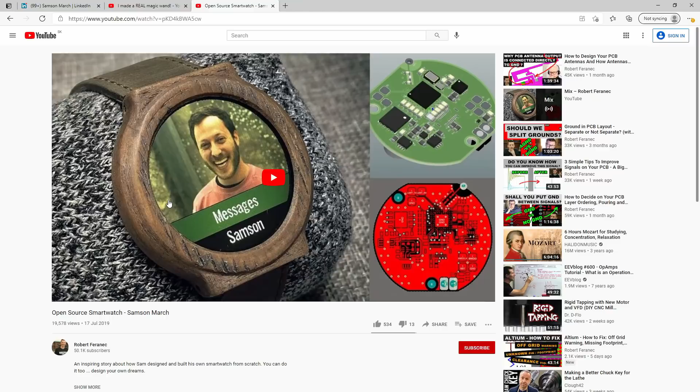In this video, I'm going to play a call which I had with Sam, where he talks about his latest open source project called Magic Wand. The project is about creating a wand which can be used to control, switch on and switch off different electronic devices. Maybe you remember I already made a video with Sam where he talked about how he designed his open source smartwatches, and you may also know Sam from his other project called Smart Glasses.

All of Sam's projects are open source, and if you'd like to have a closer look, just go to Sam's GitHub. Here you can see all the files for the smartwatches - the PCB files, schematic, and software files. Here you can also find all the files for the smart glasses, and also for the project we're going to talk about, the Magic Wand.

This project, which Sam is going to talk about in this video, is basically a wand with a battery powered circuit, and this circuit can sense the movement of the wand, and through Bluetooth it can send these movements to a plug which can then switch on or switch off the devices connected to it.

Okay, that's everything for the introduction. I really hope you'll find this video interesting and learn something new. Sam is going to start by answering the question: what kind of project should you want to work on? So here is my recorded call with Sam.

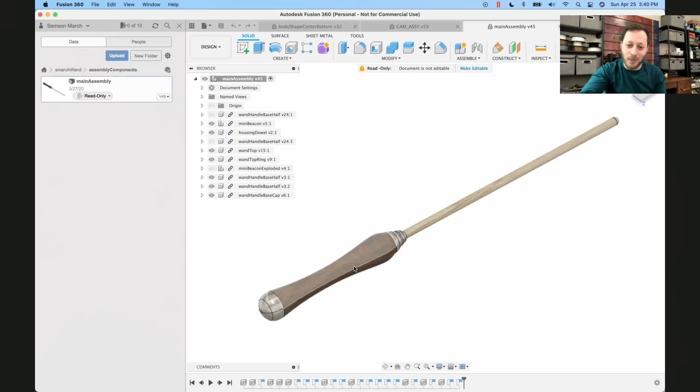Yeah. So here you can see this is kind of—I wish I was good at drawing, I feel like that would make my life a lot easier, but I'm not good at it. So typically, to put ideas on paper, I'll open up some CAD and start creating shapes. I was like, okay, this was kind of the shape that I thought I wanted, and I started thinking through how I could make this—okay, I'll make a top part, a bottom part, maybe buy a dowel from a hardware store and use that as the wand part, and I have to find a way to hide stuff. So I started thinking through all that.

And then as I started thinking through it more and more, you can kind of see here a whole bunch of different parts on the side. As I got more intricate with my designs, it ultimately led to this. We can talk about all the different parts individually, if you'd like, and how they all fit together.

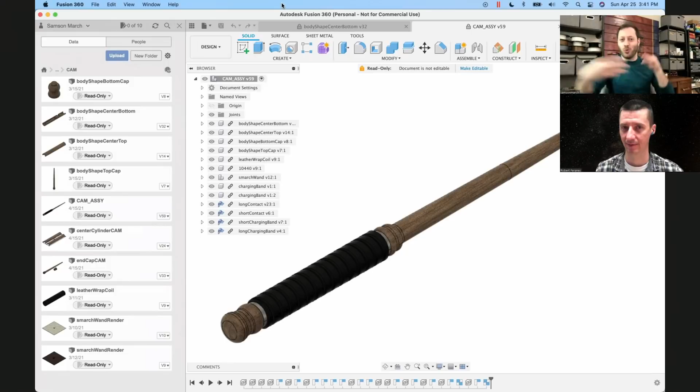But initially you only had this shape and maybe an idea of how it's going to fit, but you didn't have all the parts yet? No, no, no. Originally it was just one solid piece that I was thinking was going to be this shape, and I knew it had to be no wider than this width. Did you try to build it? No, I didn't.

Because for me the most important part was, when I was holding it, I wanted it to feel like a magic wand. So I went around the house and started picking up things that were long and narrow—like if I held up a pen, does this feel like the right size? No, it's a little too small. What about a Sharpie? Does this feel right? Oh, this is closer. I started picking up different things around the house—so, is this too big?

Is this too small? Type of thing. And I think I narrowed in. I want to say it was maybe 16 millimeter. It was the width that I felt for my hand was the right size. And I'm sure it's different for different people, but for me, that was the right size. It felt like this is something that I could keep in my wizard robe, and I could pull it out, and it would feel like my magic wand.

So you knew how it is going to look, and then you took some reference board, I think? Yes. I have some development boards, and I actually have one right here, so I can show you. I have these development boards that I bought, and it has the Bluetooth micro that I wanted to use, and I soldered on a little accelerometer development kit as well, and this way I could play around with it a little bit.

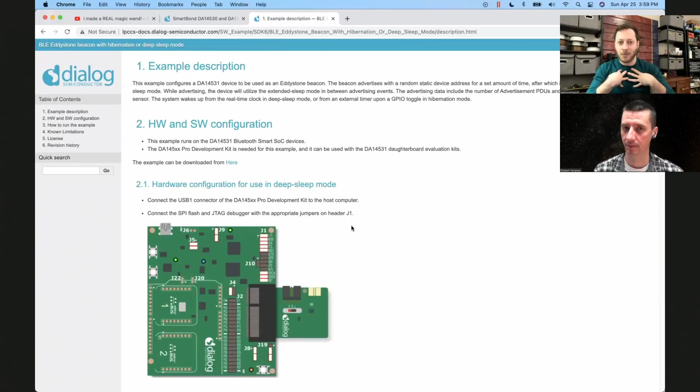This is what you have to plug in. This is how you run the setup. Start Keil, open this, blah, blah, blah. And they talk you through everything, which is really nice. And it makes it very easy for someone who's firmware dumb like me to understand this stuff and actually make it happen.

And how difficult is it for people to understand the Bluetooth protocol from this documentation? Do they need to study it a little bit differently? Because I was curious, so I created one project on Bluetooth, and I know it's not only about the communication and the firmware, but you also need to understand what these devices are talking about. So you need to get some kind of background about how Bluetooth works.

I would say that if you are just starting out, there are some good websites that have a quick intro to BLE, explaining the GAP, the GATT, the services, characteristics, descriptors, all those different things. There are a ton of things that go into it, and it can be overwhelming and complicated.

The way I like to think about Bluetooth, and you can cut this from the video if you want, is like a big apartment building, where the device that you're communicating with is this apartment building. So when you walk into the apartment building, the way that the information is structured is each floor is a different service. So I can go to the second floor, and that's this particular service.

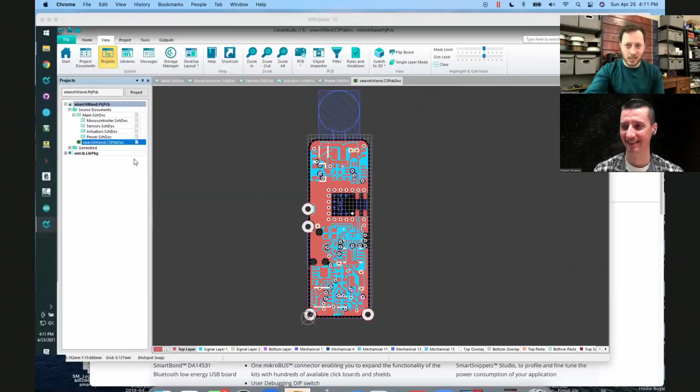And then the next phase was building it. Next phase was building the electronics. Yeah. And I'll jump over to the schematics right now. This main page that we're looking at right now is, if you think of just like a block diagram drawing of everything, right? So you see there's a microcontroller page, an actuators page, power page, and a sensors page. Nothing crazy going on here other than this is just generally almost like a table of contents. You're seeing how the whole thing is going to be laid out.

And so typically what I start with is the brain, which I consider the microcontroller. This block here in the middle, the one that's labeled BLE, is that Dialog chip that we were just talking about, that DA14531. I really like this chip. This one has built in the Bluetooth. Yes, it's an ARM M0+ core, and it has the Bluetooth radio and some additional stuff built into it. And you can get the kind of firmware where everything is running, and you just build on top of this your own application. Yeah, absolutely.

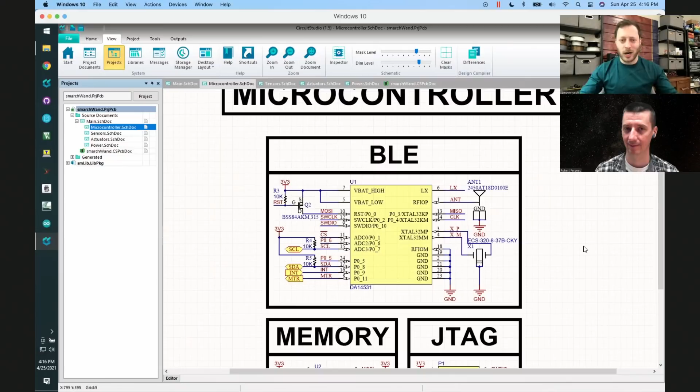Which is great. One of the things that I really like about this part, and the reason that I've actually used it now in 2 or 3 projects, it's really small, it's really cheap, and it uses really, really small amounts of power. The transmit power for this device, when it's actually transmitting over Bluetooth full blast and everything's running, I think it's like 3 or 4 milliamps. I know, that's the reaction that I had. It's so small. It's like an LED. Yeah, I think it's actually less than the LED that I have on here, right?

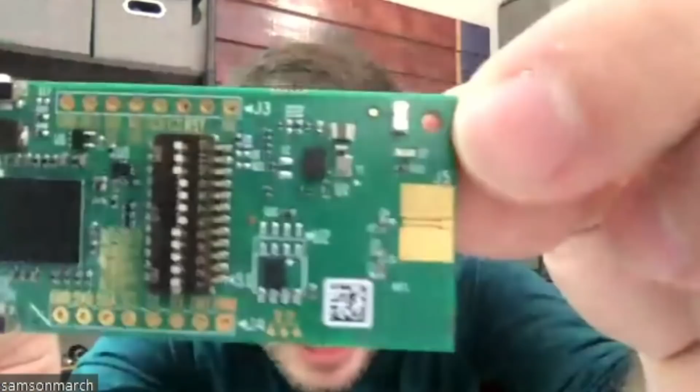And not only that, it's 2 millimeter by 3 millimeter. It's tiny. I don't even know if you can see it in here, but the little black chip right there next to my finger, that's it. That's the whole thing, right? So it's really small. It's like 50 cents in high quantity, and it uses super low amounts of power. The biggest downside, and it's kind of up to each individual person, but there aren't that many I/O, right? This is the entire part. I think it's like 24 pins or something like that total.

So it's small. There aren't that many I/O, but if all you need is maybe an I2C bus, 2 or 3 I/O pins, that's more than enough, right? Like for this project, I needed an interrupt I/O, one I/O to trip the vibration motor, some I2C pins. For the sensor, I guess. Yeah. For the glasses, I wanted to make sure that I had different color LEDs, right? So I needed different I/O for each color of the LED. I just put a small I/O expander on this I2C bus.

So it all kind of just depends on what you need. But if you just need to turn something on or turn something off, and it doesn't have to happen really fast or whatever it may be, maybe an I/O expander is all you need, and then you can use something like this where you don't have a ton of pins.

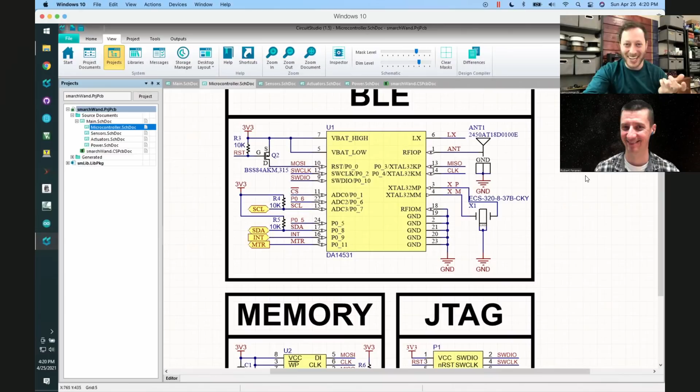Other than that, the output of the antenna is 50 ohm. Normally, I would include a little pi network between the chip and the antenna to make sure that I can tune that impedance. But I don't have a network analyzer here at home because I haven't paid $40,000 for one. And when we get there, I'll show you the trace length going from the actual microcontroller to the antenna is like 20 mil long. So I was like, one, I don't have enough space for a pi network, and two, I'm not super concerned about impedance mismatches right here, as long as I roughly get my coplanar waveguide math right.

Other than that, on this page, there isn't much more. I have a little bit of flash memory. How do you use the flash memory? So it's SPI flash. But is it the firmware inside of the flash memory, or you have it just for some additional data? Both.

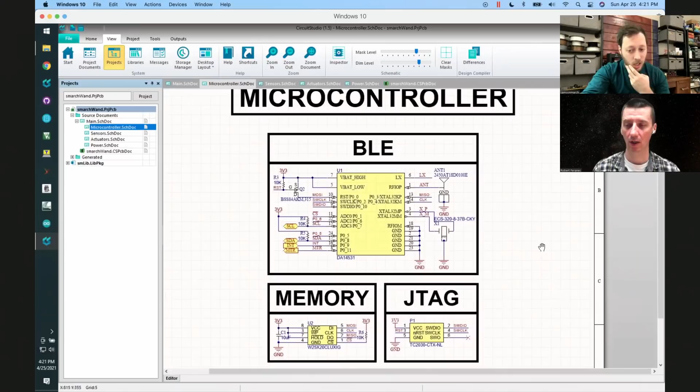So there's no flash inside of the microcontroller? Yes, that's correct. That is a downside to this part, right? There's no built-in flash to this part. The way that this part works is when it first comes on, the bootloader will look to see if there's any SPI flash connected, and then it will look at a specific address for the code. Once it finds the code that it's going to run, it will pull all of that and load it into some internal RAM so that it can run the application code.

So does it mean you have to program this flash before you solder it down? No, you do not. Okay, so there is something inside of the microcontroller, a bootloader or something? Yeah, there is some ROM, and actually, if you really want to, you can. There's enough memory on here that you could do a one-time programmable flash to ROM.

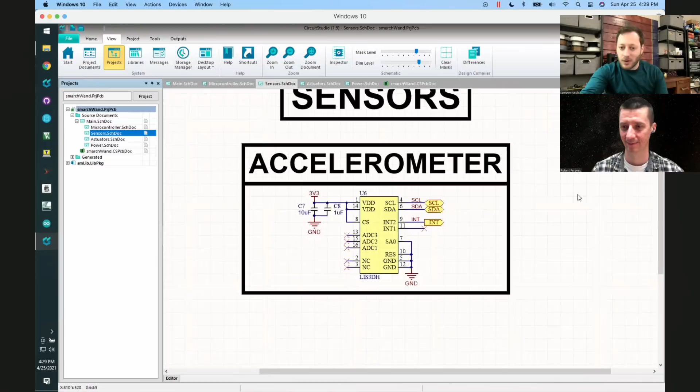So if I was going to do it again in a different world, that's how I'd want to do it. In this scenario, I had to do a little bit of firmware trickery and some filtering to try and figure out what is actually happening without knowing what the velocity was. So this page is pretty straightforward. It's just the accelerometer. It's read over I2C, and there's an interrupt.

The way that the device works is it goes into a low power mode 3 seconds after the last movement. So after I do my gesture, if I hold still for 3 seconds, everything shuts down. I think it draws like 150 microamps in sleep mode. So my one LiPo battery in theory could last like 50 to 75 days, depending on how much I'm using it.

So what happens is as soon as I take the wand and lift it into a particular position where I'm pointing the wand straight up, that interrupt pin will toggle and wake up the microcontroller, and then everything starts. So when that interrupt pin wakes up the microcontroller, the microcontroller then turns on this vibration motor for 1 second.

So this is feedback for you that you can make the gesture. Exactly, that's exactly it. Because it looks like a wand and there's nothing else there to indicate it's listening, I thought, what's a cool magical way to know that you're ready to cast your spell? Well, the wand has to vibrate with all of this magical energy, right? So you lift your wand up, it vibrates in your hand, and as soon as it's done vibrating, it's ready to start listening to gestures.

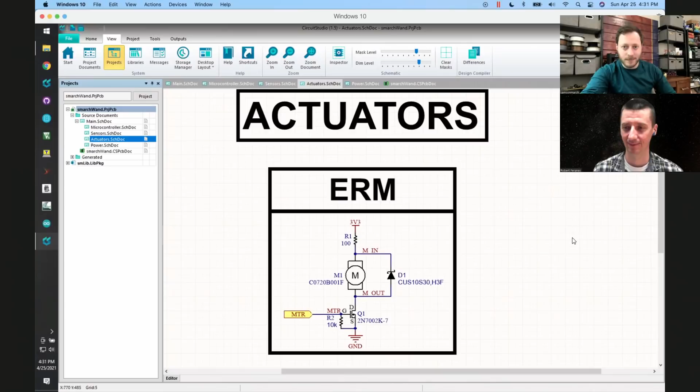So on this actuator page, there's literally one thing. It's just this tiny vibration motor with a little FET to turn it on and off and a flyback diode. Nothing too crazy. What runs everything is here on this power page. As we talked about earlier, this is like the digestive system: what takes the energy in, turns it into usable energy for the system, and then distributes that energy.

The charger and the battery are pretty self-explanatory. The battery is a lithium polymer battery, and the charger is just there to charge it. The more interesting stuff is the protection and the buck. The buck is the regulator we talked about earlier, going from the battery voltage to 3.3 volts. What is the efficiency? I'd have to go and look, but I want to say it was like 85 or 90%. It's pretty good, not perfect. Nothing is, but it was good enough.

It's tiny. It's this little 5-ball BGA, which is one of the reasons I'm using it. Let's see if I can point it out to you guys. The little black dot right there next to that big inductor and that small 0402. The inductor is bigger than the buck, right? So that guy right there is the little buck. It does a good enough job. I've used that part before, so I knew it would work the way I wanted. I was happy with it.

All it requires is some input capacitance and some output capacitance. There's no feedback pin for an adjustable voltage or anything like that, so again, I'm trying to minimize part count to keep it all in this small space. I only ask because I was working on a battery powered project, and we had to count every microamp. For this project, it wasn't as much of a factor, because it sleeps all the time.

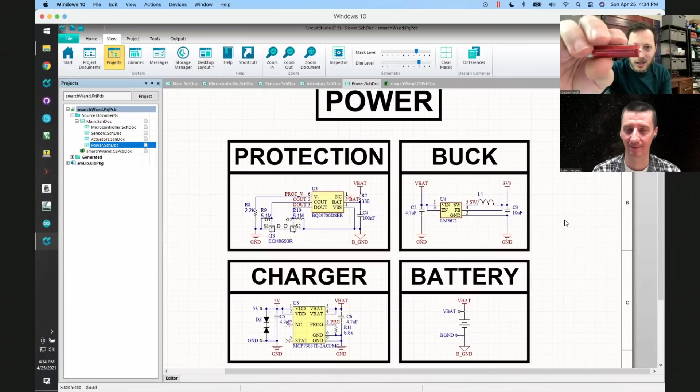The power consumption of the device when it's fully active is 5 milliamps or something like that, when everything is on. And these are the batteries I'm using. They're 10440, so 10 millimeters by 44 millimeters, basically just AAA size LiPos. They say they're rated for 350 milliamp hours; they're probably 250. But when I'm using 5 milliamps active for 10 seconds every 2 or 3 hours and it's sleeping the rest, it's such an insignificant power draw compared to the battery that I wasn't super concerned with the efficiency.

It is a big deal in other scenarios, like the glasses. I don't have one of the boards around, but on the glasses I was using a tiny lithium ion coin cell battery, I want to say it had like 10 milliamp hours. It was tiny. So for that one, it was a really big deal to figure out the efficiencies and make sure everything was good.

Other than that, on this page, there's this protection circuitry. Is this the same one as in your smartwatch? I think it probably is. Very similar design, very similar idea. All it's doing is disconnecting the grounds between the circuit ground and the battery ground when the battery needs to be protected, so if the voltage is too low where you might damage the cell, or the flip side, if you were to accidentally apply too high of a voltage, an overvoltage scenario, it would just disconnect the battery so you don't accidentally damage the cell.

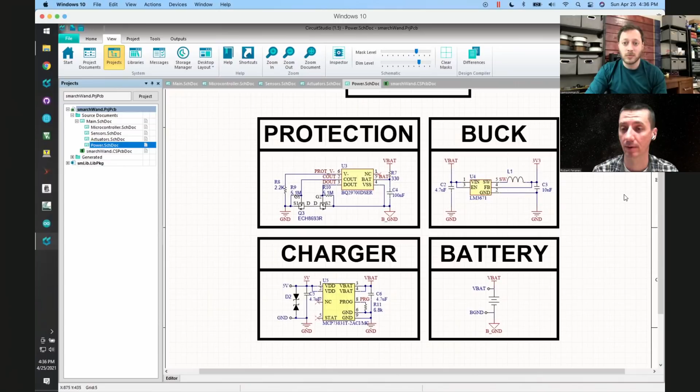That is the schematic, that's the whole thing, that's the entirety of the wand. What makes sense to do now? Do you want me to jump into layout, or talk about something else? Let's have a look. I'm thinking what would be better. Yeah, layout, let's do layout. And then we can do the socket. Yeah, for sure.

So pull up the 3D view first. So this is the layout, this is the whole circuit. Nice 3D model again, thank you.

So here, I can't remember the exact size of the board, but we'll do a quick measure. So the board is... there you go, the board is 10.5 millimeter by 30 millimeter, so it's a very, very small board. And actually I made sure to pull one out before we started, so let's just hold up - so this is a AAA battery, and this is the one board.

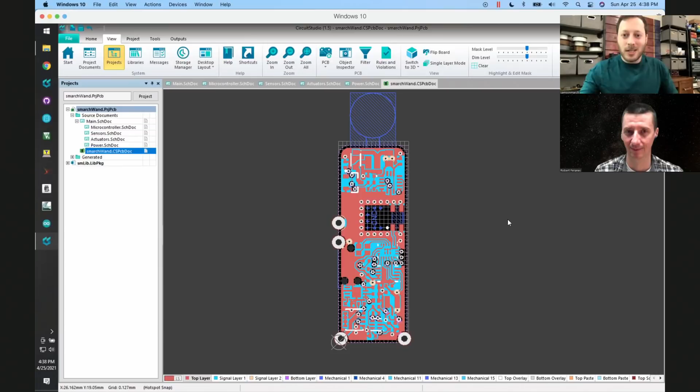So you can get a feel for how big everything is and how much space I actually had - not a lot. I wanted to keep all the assembly on the top layer because I'm assembling everything by hand, and I didn't really want to do a double-sided assembly. I've done them before, but if I didn't have to, I'd prefer not to. So everything, all the components, are on one side. This is the back side - the only thing on the back side is the JTAG.

So you flash it on the back side, and then this is the front with all the components. We'll quickly just run through what the placement of everything is, and then if there are sections you want to talk about, maybe we can jump into those to give you a better feel. So you may notice these castellated pads in the corners.

We'll talk about it a little bit more when we get over to the 3D model, but this castellated pad here on the right-hand side is the positive terminal of the battery. This is the negative terminal of the battery. These two castellated pads are for the charging contacts - this top one is ground, this bottom one is 5 volt.

Other than that, let's see, so down here - can you see my mouse? Yes, I can see. Okay, so the stuff here in this bottom left corner, this is the protection circuitry stuff. This is that little protection IC, this is that dual NFET package. This guy right here is that little buck converter we were talking about, this is the inductor for that buck converter. This right here is the battery charging IC. This right here is the flash for the device. This is the micro - you can see that little tiny trace going straight to the antenna. This is just the crystal for the micro.

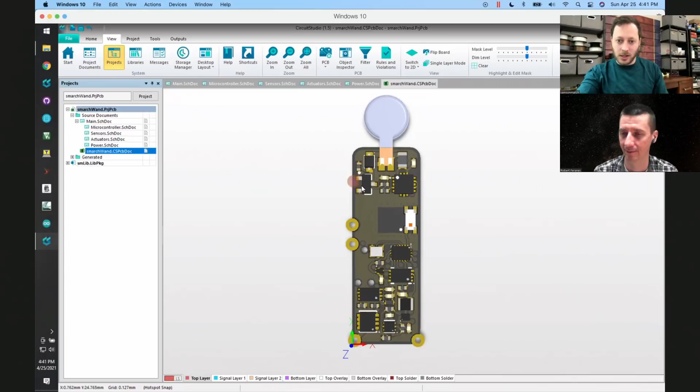And then all of this stuff is related to the vibration motor, which is right here. This is the little FET, flyback diode, current limiting resistor type of stuff for that motor. That is the whole thing, right? That is the entirety of this design.

Is it enough that you basically hold it, or where exactly is it placed in the wand? It's right under your hand. So a lot of the Bluetooth radiated energy is attenuated by your hand, which is not great. I agree, for the signal integrity, right? Yeah, it's not going to hurt you, but it is just one of the unfortunate things.

That being said, I'm still getting pretty decent range from it. My house is not huge, but I can be on one side of the house and wave the wand around, and I can turn stuff on the other side of the house.

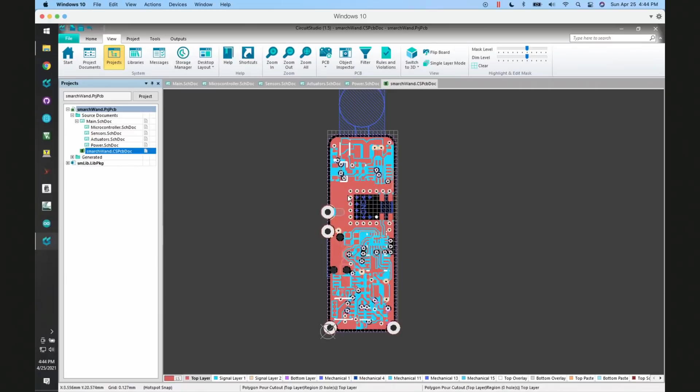You were asking about the copper under the antenna. You can see here, all this is removed right here. The board is actually a 4-layer board. The red is the top layer. The blue is like a ground plane on the second layer. This yellowish color is the 3.3 volt rail power plane. And then the bottom is just more signal with another kind of ground pour around it.

Where do you manufacture your PCB? So all these were made by PCBWay in Shenzhen. But they've done a great job. I would say I've probably been using them for personal projects for 5 years, maybe 6 years at this point. And I don't want to turn this into an advertisement, but I've consistently had really good experiences.

I know them. We have been providing some coupons for our students for good discounts, some of the time. I really like them, I've had really good experiences with them. Even their customer service, if I have questions, they get back to me pretty quick. Price is good, the speed is really good on them.

Like, the boards that I had made, these are the smart plug boards. I probably ordered them on like a Thursday, and the next Tuesday or Wednesday they were at my house. And I want to say I probably paid $50 with shipping for maybe 50 of them or something.

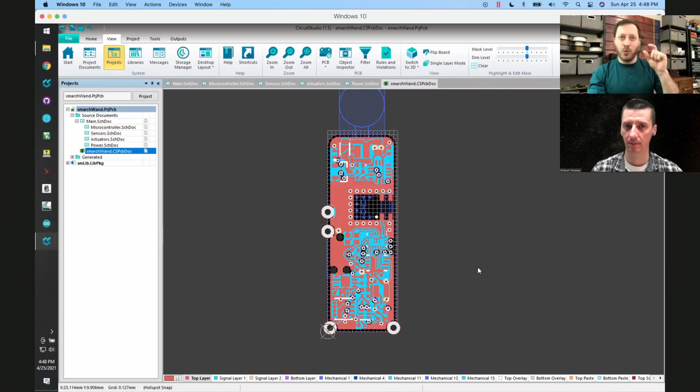Do they have a stack-up on the website with impedances? Yeah, you can go on their website. They show you all their standard stack-ups for their different layer counts and different widths. So this wand board—I think the wand board and the smart plug board actually are 0.8 millimeter thick boards, not the normal 1.6 millimeter. Part of that was because with these smaller thickness boards, the way the stack-up worked out, the antenna trace could be a pretty normal size trace. I think this ended up being, let's see, what is this?

This is 0.2 millimeter width. The bigger the gap between this top layer and that reference plane, the bigger that width has to get. So, one for size reasons, but two because it makes that antenna routing a little bit easier. I've been really liking the 0.8 millimeter stack ups recently.

They have a big page dedicated to, if you want a 6-layer board at 0.8 millimeter thickness, this is what the stack up looks like, and this is what the dielectric constants are of all their different prepregs and cores and everything like that.

Do they suggest also the impedances, or do they have a calculator for impedances, or do you have to use something like Saturn PCB to calculate them? I use Saturn, yeah, in fact I have it right here, the Saturn PCB tool.

I don't remember if they have dedicated numbers for like use this trace width and this spacing. Actually this is why I use JLC PCB, because they also have a calculator.

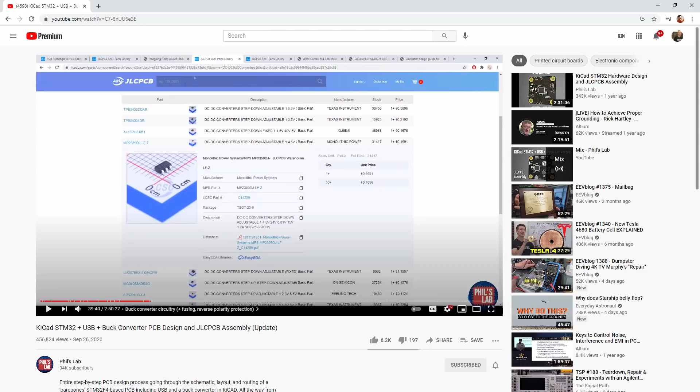I've seen some videos from Philip, you probably don't know him, but he's using KiCad and JLC PCB, and he also always builds the PCBs directly in JLC PCB. I was surprised, like the price is very low, and you don't need to handle components, you don't need to solder it. They do it.

So that's the big thing that I want to try, their assembly services are really cheap for their library of parts. Exactly, yeah, you need to be willing to use components from their library. If you're willing to use their parts, it can be pretty cheap. So I definitely want to give it a go.

So basically, when you buy this PCB, you also get the stencil, I think, through PCBWay. I actually use a company called Osh Stencil. I started using them before PCBWay started offering stencils, and Osh Stencil has been consistently really good, so I've just been using them for years now.

So you upload like top layer data, stencil data, and then they will send it to you. This is their site, it's not super pretty, but it's pretty cheap, it's like $10 for a stainless steel stencil. You upload the Gerber files you want, and they'll laser cut it and send it to you.

So if I'm doing a two layer assembly, I'll upload the top paste and the bottom paste and the keep out layer or the tool routing layer or whatever. If I'm only doing one side, it's just whatever paste layer I need, and that's it. And then they send it over.

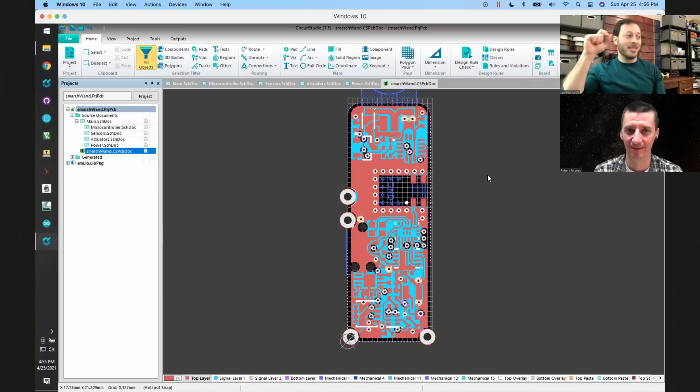it and place everything. So then the next step is after it's got paste on it, I take some tweezers and one by one, I put every part down and make sure it's all roughly in the right spot. One of the nice things about solder paste and reflowing is as long as you're close to being in the right spot, when the solder paste heats up and reflows and turns into molten liquid solder, the surface tension of that molten solder kind of aligns all the parts. It pulls them to the right spot. So I have to be close, but I don't have to be 100% perfect exact, which is nice.

What solder do you use? Because there are like many. Do you have a favorite? I don't have one. I'd have to go look at it. I can send you a link later, but I'm sure I just went to DigiKey and I was like, oh, lead-free solder paste. Okay. And whichever one they had in stock and was relatively cheap, I was like, that's the one.

Okay. And I've seen you have a very nice little soldering oven machine. Yeah, the little oven. The little oven is probably one of the best pieces of equipment that I bought. Which one is it? It's the T962 or something like that. It's a pretty common one. Can you find it on the internet? I think it's the T962. Yeah, T962 reflow oven. Let's see. You can get it on Amazon. Look at that. That's exciting. Yeah, this is the one.

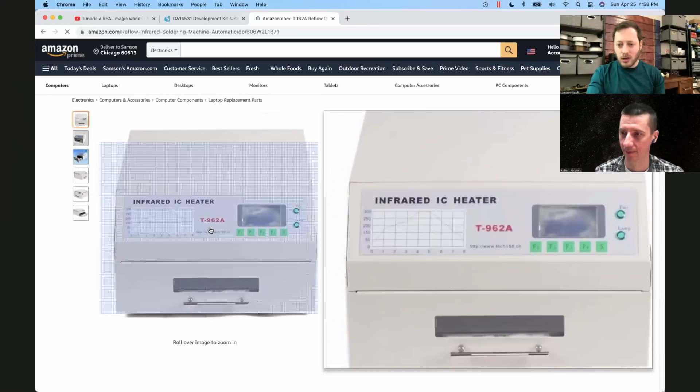And it has the option to, let's see if I can find a picture for it. I'll go back to that Amazon one so we can look at a better picture. But you can select from a whole bunch of different reflow profiles. It has a whole bunch of preset ones, or you can make a custom one. So if you want it to go up to this temperature by this minute, if you want to do a soak and then you want to do a full bake, you can adjust it. It's granular to every 2 or 3 seconds. So you can adjust everything and it works great.

The one downside to it is it's not a perfectly even heat distribution inside. So there are kind of some sweet spots, like if I put a board here, I know it'll reflow. If I put a board over here, some of it may reflow. It's not consistent all the way through, but it's one of those things that you kind of pick up. Okay. Let's continue with the wand.

All right. So I'm going to close that for now and the side panel just to make this a little bit bigger. So this is the wand as a whole. It's made up of 4 parts plus this leather wrap around the middle. And I will turn off the leather so we can kind of look at it. And I'll turn off all of those guys. So the 4 wooden parts.

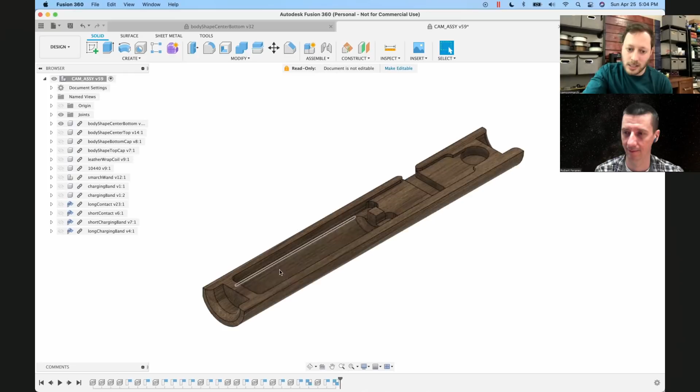I'm going to turn this and you can probably see there, one side of the wand is actually flat. You see this flat side right here? Let me see if I can do it from... I can see it. Yeah. So one side is curved, one side is flat. And the one thing that we haven't really talked about is how the battery and how the charging pads actually connect to the circuit. So I'll show you that in a sec. But this flat right here is for the charging pads that we'll talk about.

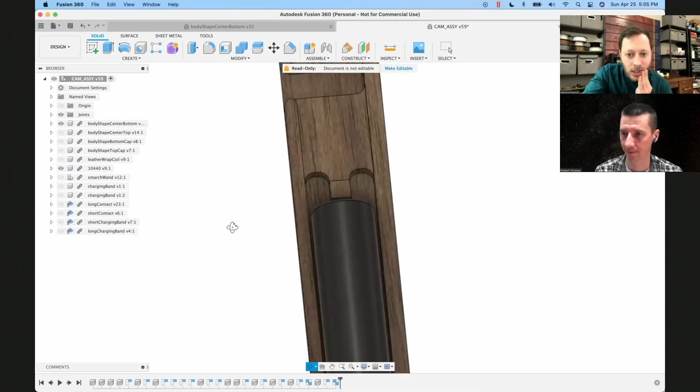So here's the bottom, right? And here, this is the battery, so you can kind of see where it fits, right? Let's see if I can find a better angle to show you. So battery, bottom part, and then if we include the wand PCB, right, you can kind of see now where it all fits relative to the battery, where it fits relative to the wand part.

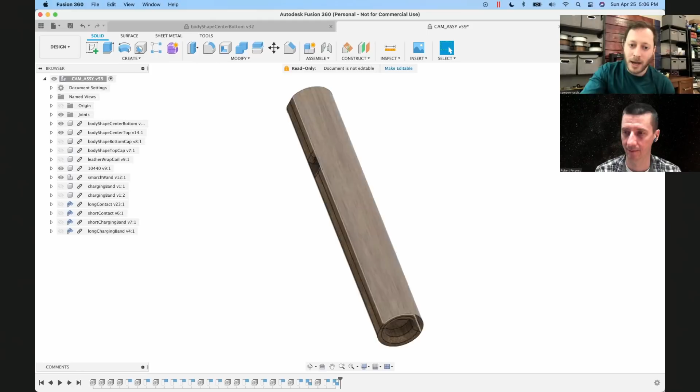This whole thing is then covered by a top piece, top wooden piece. And inside this piece, it looks very similar to the bottom where it kind of has that scoop, that cutout for the battery, and it has another kind of scoop cutout above the PCB for taller components. And so in reality, this is everything you need to make it work. The other 2 parts are purely just aesthetic, right? They're just to look good.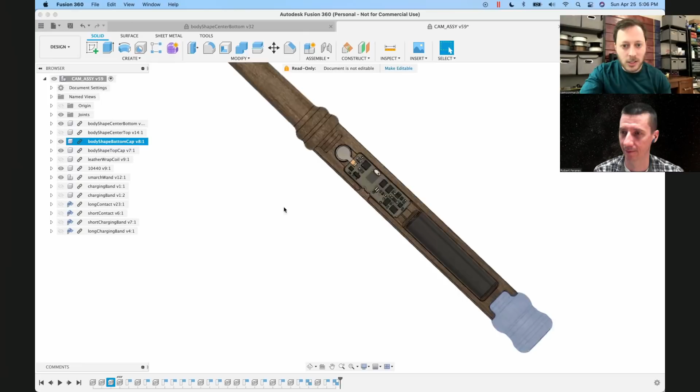So here we have this little end piece, this little cap, and here I'll turn off the top so you can kind of see. So this little end cap piece, he fits in, kind of press fit, and then I added some wood glue just to keep it in place. And then the same is true for the top part, right? So again, this big long piece, it just press fits in plus some glue just to keep it in place. So this is what it looks like when all the wooden pieces are put together.

Remember when we talked about it though, I want to make sure that it looks like it's one constant piece of wood, right? So ideally, I don't want to know that this middle piece, the part that I'm holding, is made of 2 different parts. I don't want to know that there's these metal charging contact things that are going to come out in a sec. I don't want to see that there's a split in the wood grain or anything like that.

So to hide all of that, I thought it'd be kind of cool if I just added a leather wrap around, and that way it just hides all of that, right? And I feel like not only does it hide it, but the aesthetic of it kind of fits. It looks better, yeah. It looks like a magic wand, right? It looks like it was actually meant to be that way.

So I'm going to hide that leather again, and I want to talk really quick about the charging and the battery contacts, because I think it's a little bit different than what I normally do, and I think it's kind of interesting. It's a little bit unique. So remember, I talked about those castellated pads, and what they're there for is I bought some spring steel, the same stuff that you would use to make a battery pack of 18650s, that you would normally spot weld to the batteries.

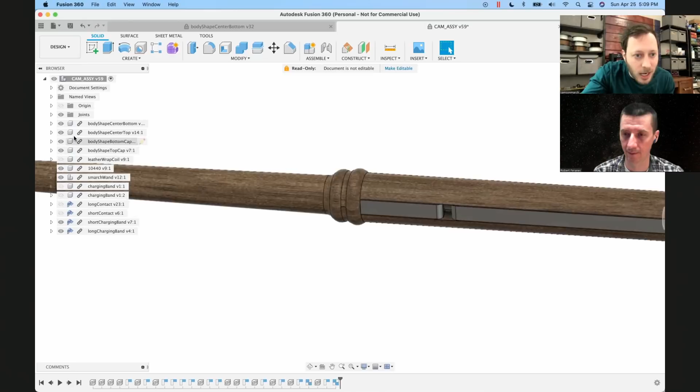I bought a coil of that stuff, and I thought, well, maybe I can just solder that into one of those castellated pads. So right, steel, castellated pad, it just comes in here, and then I fill in that gap with some solder, and then I could run that steel out along the edge of the wand, and I could make some charging pads with it. So let's see. So here, I'll take off this top piece. Nice. So now there are these two pieces that run out from the board like that. And then at the very end, this is it.

At the very end of these metal pieces, there are these metal circles that wrap around the wood, right? So now it looks like this, and with the leather, it looks like this. Oh, so you can have a holder, you put it there, and— exactly. So that's how you charge it, right?

This top one is the 5-volt. This bottom one is the ground. Or sorry, no, it's the other way around. This top one is the ground. This bottom one is the 5-volt. And I actually made that choice intentionally, because the way that the charger, which I haven't designed yet, but don't tell anyone, the way that the charger is going to work is I want it to look like

almost like a rock or a stone or something that you just find in a forest, and I want the wand to just rest on it, like you're just leaving it on a rock. And so what I thought is, if the bottom one is 5-volt, there's no way you can accidentally reverse the polarity, right?

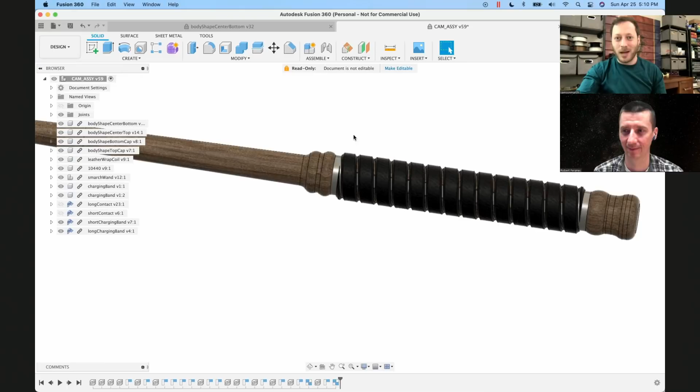If the bottom one is where the wand sits, you can't accidentally connect ground to this bottom one because the tip of the wand would get in the way. So by putting them in this orientation, the bottom one being 5-volt, the top one being ground, you can never accidentally flip the orientation.

So continuing on, we have the charging bands, and I thought, if I'm doing the charging bands like that, maybe I could do something similar for the battery, because a big connector for the battery would take up too much space. If I had a JST PH connector or something on here, it's too tall. Or if I bought a battery holder, I'd have to increase the diameter of the wand by another 2 or 3 millimeters. So it's too much space.

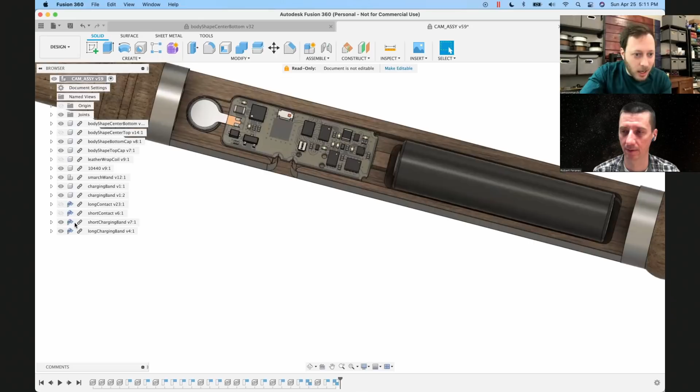So instead, I did the same thing I did with the outside coils here. Let's see if I can rotate it a little bit more so you can see it. So there's one piece that comes from the top of the contact, like that, and folds over itself into that castellated pad. And then there's another one that wraps around from the bottom, and it goes to the other castellated pad. Very nice. So what exactly is this part?

This metal? Yeah, the metal, yeah. All right, I'm going to duck out of the camera. Do we find it in DigiKey, or where did you buy it? I think I just bought it on Amazon. Because this is interesting, actually.

Yeah, it's something like this, right? Ah, okay. So this is how it comes. It just comes as a big coil of the stuff. It's really thin, so it's very easy to bend, right? It's very malleable, and you can just cut it with some scissors. So you can bend it, but it's still also flexible.

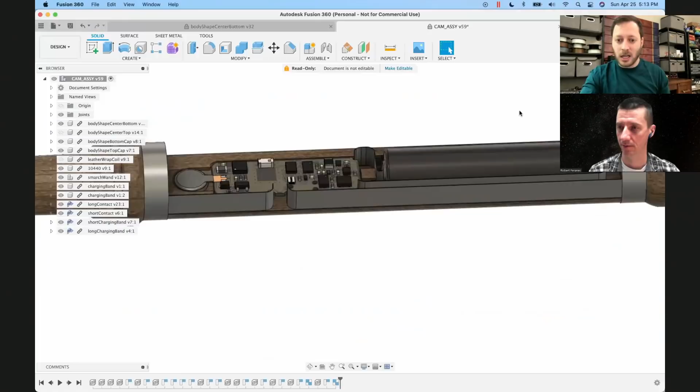Yeah, and what's actually not shown in this CAD is it's so malleable that these bends I had planned for wouldn't hold, right? Because it would squish. So what I ended up doing instead is I had some neoprene foam. So I put a little bit of neoprene foam

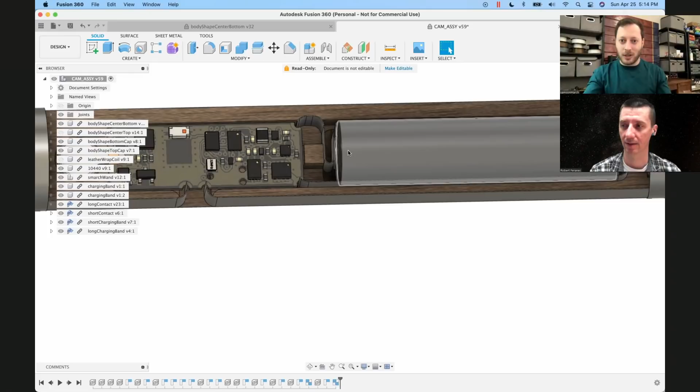on both sides, and that allows the battery to compress the foam, so the battery stays in place with the contacts pressed in, but it's not so tight that I'm worried about puncturing the battery, or if the battery swells during charging, it's not going to damage the cell. The foam is compliant enough that you can still move it around a little bit. Yeah, I understand. Good idea.

How do you update firmware? So once it's actually in the wand, I don't. The one that is currently built up, there's no way I'm doing anything with it ever again. So you have to write a bootloader or something first. Yeah, if I wanted to, the Dialog SDK has some good examples for over-the-air updates. I didn't incorporate it in mine because I wasn't thinking that far into it. But it is something that I could do in the future if I needed to.

So you basically glue everything together, and there is no way to access the board after it's built. Yeah. And here, I actually have it right here, so I can show you guys. So this is what it looks like once it's all done. And you can actually see when I was making it, the CNC accidentally bumped up against this one piece after it cut it out. There's this nice little notch in the bottom, but this is what it looks like.

And you can see these are the charging pads, and the leather wrap with everything. So this is it. Everything is glued up, and the battery and the board are all in here. And it's ready to go and do its thing.

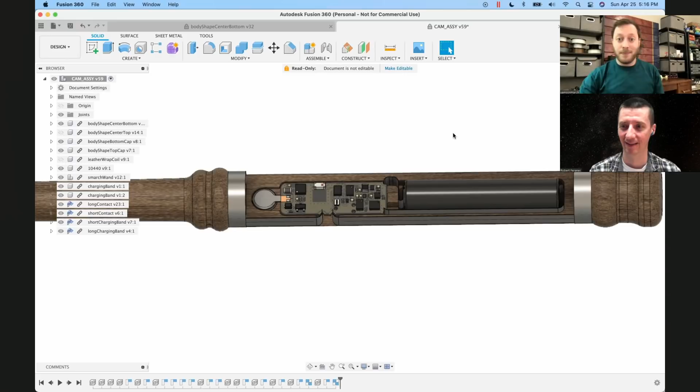Okay. But yeah, so you created this. So I created this, right? And once all this is done, unlike in 3D printing, I can't just upload the file to a slicer program like Cura or something, right?

For a CNC machine, I don't know how familiar your subscribers are with these kind of machines, but a CNC machine is like the inverse of a 3D printer, right? So instead of building something up layer by layer of plastic, you would put in a block of wood or a block of metal or something, and it's going to cut away at that material layer by layer until all that's left is what you wanted originally.

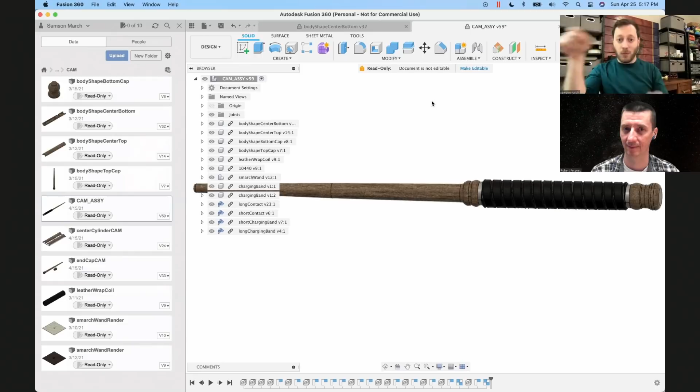So it's like instead of, well, you get it, right? Instead of building up, it cuts away. Yeah. But unlike with 3D printing, you actually have to tell the machine where to go to cut away at all this stuff. And that process is called CAM, C-A-M, or Computer Aided Machining, I think is what it stands for. So there's CAD, which is Computer Aided Design, and that's the 3D modeling and stuff. And then there's CAM, Computer Aided Machining, and that's telling the machine actually where to go physically to cut away stuff.

And so say I wanted to actually make all this, right? The next step is to actually design the CAM for that. And so I'll pull that up.

And again, if I'm going on too long or if I'm ranting stuff, just cut it. No. This is interesting. I don't know how this is done. Okay, cool. So I will show you.

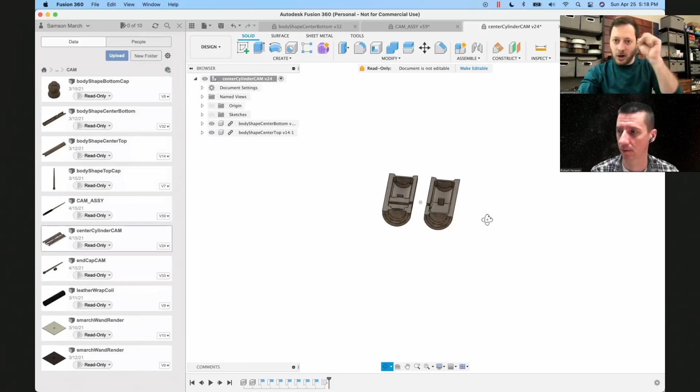So when you're going to do the CAM process, the first thing you do is you bring in the files that you want to bring in, right? So in this case, I was going to cut the top and the bottom piece of that inner wand part together. So I put them next to each other in the 3D design file, right? Then I go into this manufacturing tab of Fusion 360, but other programs like SolidWorks and others have this ability as well.

I go in here, and the first thing I have to do is I have to define for the computer, for the machine, what the size of the stock is. So if there's a piece of wood in there, it needs to know how tall is that wood, how wide is that wood, how long is that wood, so that when it's cutting things, it doesn't accidentally cut outside of the bounds of your material, right?

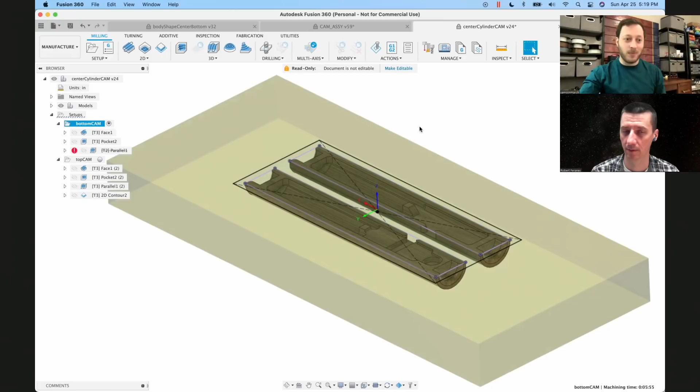So the first thing I do is I go in here and I'll pull it up very quickly, but you can basically see I said, okay, it's 8 inches long, it's this wide, and it's this tall, right? I have a physical piece of wood in my shop, and I measure it with calipers, right, to get as close to exact as I can.

Once I do that, then the next process is figuring out how to actually cut away at this material. Again, unlike 3D printing, because I'm not just building something up from nothing, I'm cutting away. For this particular type of thing, I actually have to cut it on 2 sides. So I have to create 2 different versions of this CAM file. I have to do a bottom side machining, and then I have to flip it over and do a top side machining. And I have to be very careful to align the stock so that when I flip it over, it doesn't accidentally cut in the wrong spot, right?

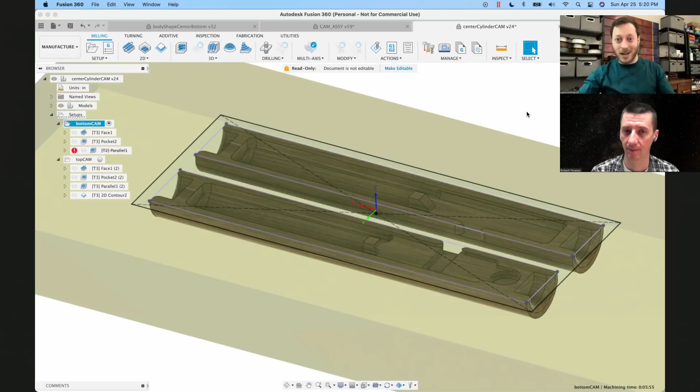So the first thing that's going to happen for this, I'm going to move this ever so slightly so I can actually simulate it. So I'm going to talk through really quick the different steps, and then I'll show you what the simulation looks like so you can see what it was supposed to do.

So the first thing that I want to do is I want to make sure that the top of the wood is perfectly flat, right? I don't want there to be any little bumps along the way, so that when it starts cutting, it's cutting a surface that it knows is exactly this height, right?

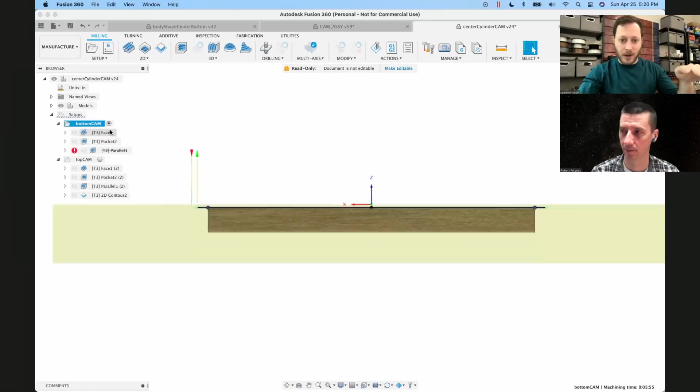And in fact, I even cut out a tiny bit extra just to make sure I know that the top of that is perfectly flat. So that first process is called a facing operation. So basically the router bit is just going to come across, it's just going to work its way back and forth and back and forth across the surface like this.

Okay. So after it does that, the next step is a pocketing operation. So now what it's going to do is it's literally going to go in and calculate where all of these little pockets are. And it's, again, going to cut out step by step all these little sections along the way so that you can see. Let's see if I can simulate both of those at the same time.

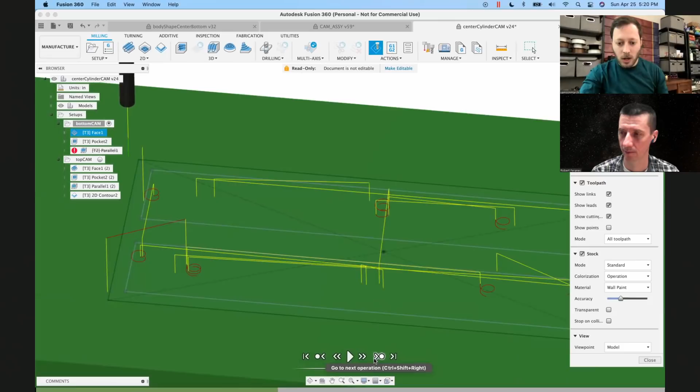So we're going to skip through the facing operation that we just showed. And then the next step is this pocketing operation. So it's going to go through layer by layer, cut away all little chunks of wood that it needs to cut away. The next step is what's called like a finishing operation.

And that is, it's going to go through, and for this, I should take a step back. For the pocketing operation, when it's cutting stuff out, it's doing it at a really rough resolution. So when it's cutting stuff out, you may be able to see steps on what would be curves normally and things like that.

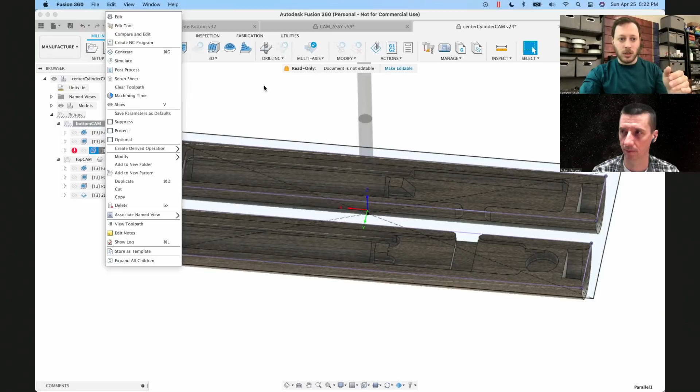And the idea is to just remove a lot of material so that when you do this finishing operation, which I'm going to show next, this finishing operation is going to go through much slower, and it's going to cut away all that extra material to just make sure that you're actually getting those nice curves.

Right? You still use the same tool, same bit? Or you can change it for something smaller? Yeah. So the first two operations are the same bit, right? The facing and the pocketing are both going to be the same tool. The last operation is going to be a different tool, a different bit.

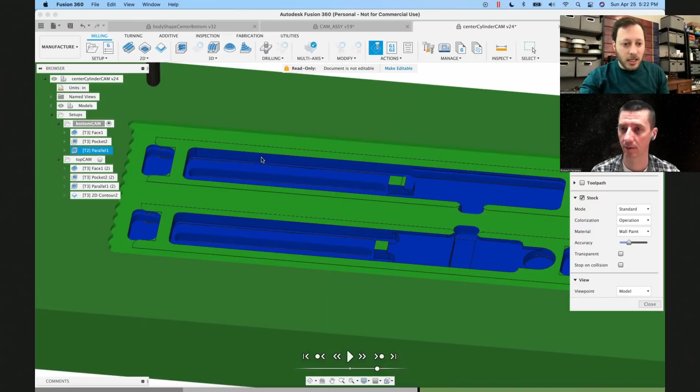And I'm turning off this sketch. And instead of being a flat bottom, it's a curved bottom. And so the idea is you don't see the steps. When I go through here, it'll be a nice curvature that follows the curvature of the tool. So here, if I kind of move around, you can kind of see. So now where that battery goes, instead of just having steps, it's actually a nice kind of little cylinder inside, right? So I do that for both parts.

Once I do that for both parts, the next step is to literally take this part out, flip it over in the machine, and then do the other side. But now, how do you actually do it? Is there like a button where you say generate this path, or do you have to somehow draw the path?

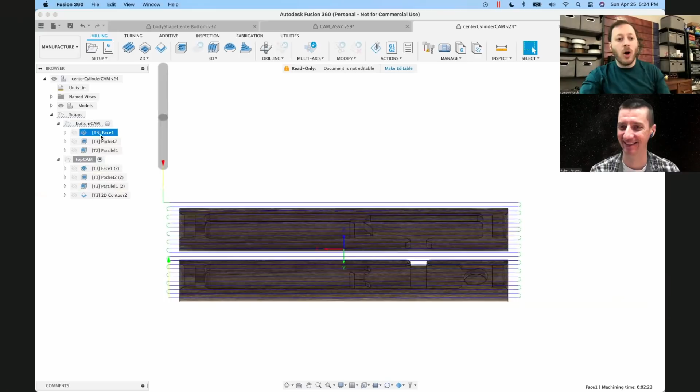Oh yeah, so this facing operation. Fusion 360, which is this program that I'm using currently, will generate what it assumes to be the best tool path for the parameters that you give it. So in this case, when I do this facing operation, I don't know if you can see the stuff on the right hand side. I can see. Right, I'm setting the spindle speed, so how fast that router bit is moving, how fast I'm going to allow it to cut along the way.

Then I'm showing it what the bounds of the area that I want it to cut are. So that's what that yellow square is. Then I'm showing it how far down it can cut. So this light blue line is just above the surface material. So that's telling it this is how high I want you to pull the bit away when you're moving, so you don't accidentally bump into stuff, right?

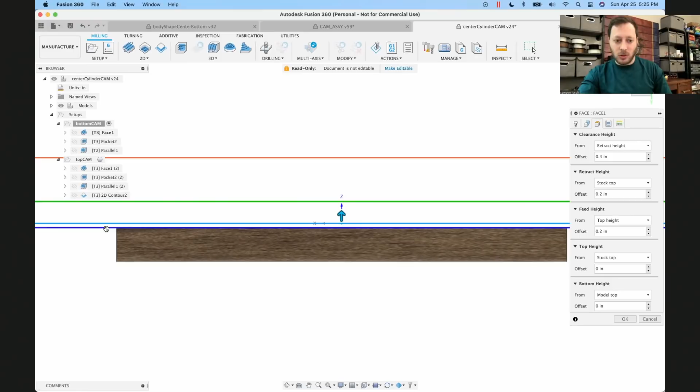And these retract and clearance heights are similar. They're different levels of how far I need to pull the thing away. The dark blue line is how far down I'm going to cut. So from the light blue line to the dark blue line, that's how deep I'm going to cut, right?

Then, in addition to all that, I need to show what the maximum depth per pass I'm going to allow. This is kind of like the layer height in 3D printing, and it's dependent on the material. The harder the material, the less material you can remove with the same spindle speed and everything. So for this wood, I was using an eighth of an inch or a sixteenth of an inch.

And then there are a couple other additional parameters, like how the tool comes in, whether it spirals down like a drill bit or comes in from the side. You have to specify all that, and it depends on the operation. The facing operation is different than the pocketing operation.

In the pocketing operation, I actually specified that I want a helix ramp in for the cutting, and I'm specifying which side of the tool I want to actually do the cutting. Let's see if I can point that out really quick.

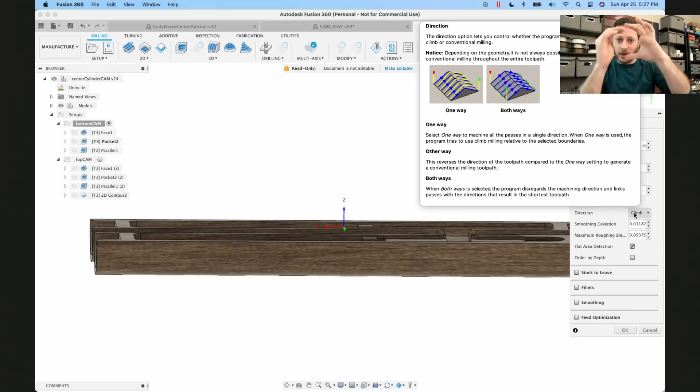When you're machining things, the spindle, like the router bit, is spinning in a certain direction. If you think about it, say the spindle bit is spinning like this, counterclockwise. If I were to move counterclockwise around the material like this, what's happening is every time it moves a little bit, the tooth of the spindle is grabbing a big chunk of material every time it bites, or every time it hits.

If I go the other way and the spindle is still moving counterclockwise, it's now grabbing a small amount of material and then it gets bigger. I don't know if I'm explaining this properly, but there are two methodologies for the direction your spindle is going to go.

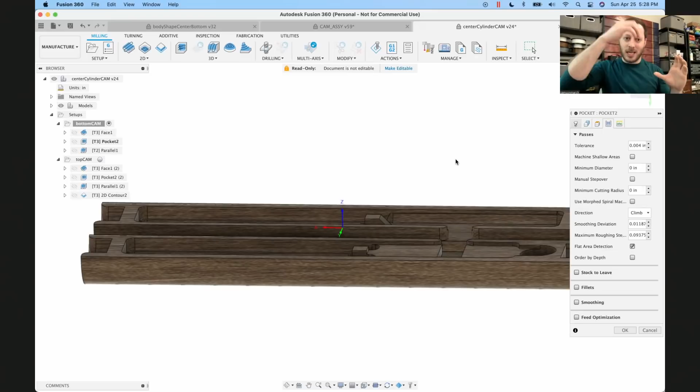It's either conventional or climb, the two different ways. No matter what direction my spindle is spinning—say it's spinning counterclockwise—how do I want the tool to move? I can either go clockwise or counterclockwise with the spindle moving, or I can go the other way. Depending on that, certain materials do better with conventional, certain materials do better with climb, and it depends on how much material you're trying to remove at once. If you're trying to avoid heat dissipation, like if you're doing aluminum, you typically want to do climb rather than conventional, so that the bulk of the heat is dissipated into the small chunks of metal you're flicking away, rather than into your stock material.

So there are a whole bunch of different parameters, a whole bunch of different things that you have to design. How do you do it? Do you Google before you start making?

Yeah, when I first got the CNC machine, it was a lot of Googling, a lot of asking people that knew what they were doing. And now it's just like anything else, like circuit design—there are certain conventions that you now know and follow, that you just reuse over and over. Like I know a power trace has to be bigger, things like that. It's kind of similar for this.

So you don't have to specify exactly where it should go. The path is generated based on the 3D model which you have here. You just specify some properties of how the tool is going to move.

Yes, sometimes though it gets a little trickier because the toolpath that it generates isn't good. Sometimes it wants to cut right through your file, or it's just a very inefficient path, or it wants to cut away too much material. So part of the art is figuring out the best way to generate those files.

So like we did one, and I won't do this for the tip and the butt of the wand because it's the same process. You do one side, which is we did the facing, the pocketing, and then we did this kind of finishing parallel path. Then if you look, you can see this is where my origin is—the Z is pointing straight up, the X is pointing one way, the Y is pointing one way.

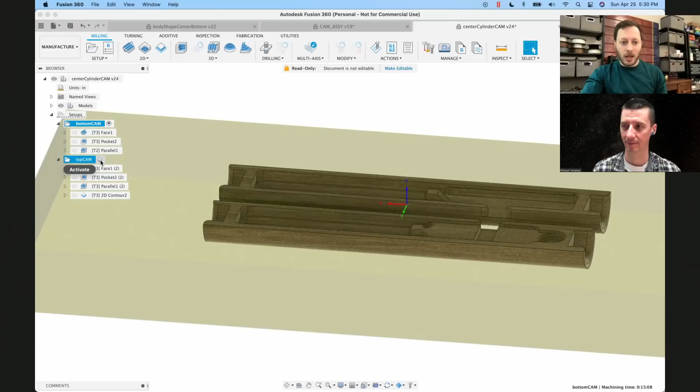If I go to the other side of the operation, I've now flipped my origin point. So now my Z is pointing a different direction, my X is pointing the same direction, and my Y is pointing the opposite. So you have to make sure you mirror it appropriately so that it cuts out the same piece.

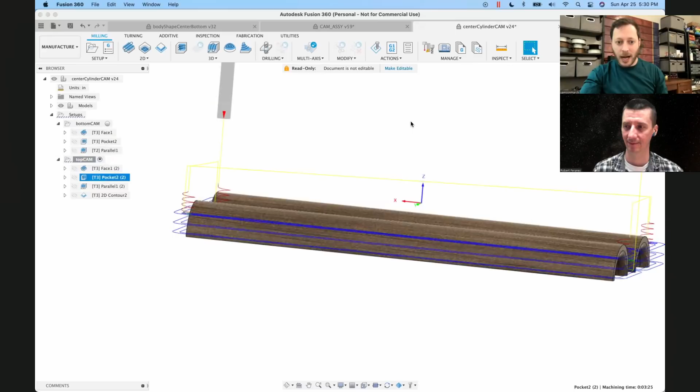So now for this side. This side's a much easier side to think about because you're just trying to make this convex shape, this cylinder shape. So for this one, the first thing again, we're going to face everything down just to get rid of all this extra material that we don't need. Then we're going to do another pocketing, kind of like what we did before, but cutting out around these cylinders, kind of coarse, not very high resolution.

Then we're going to go through and do that finishing pass to make it look really nice and smooth. And then the last thing we're going to do is finally cut it all out so it falls out of the block of wood.

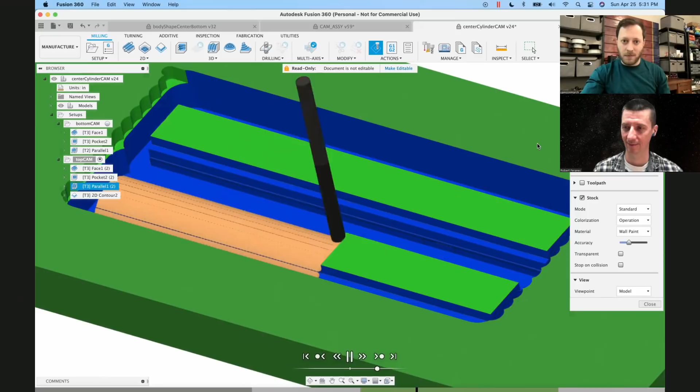So again, we'll simulate it just to show you. It's going to do this facing operation, go through a couple of layers, then it's going to do this pocketing operation. You can kind of see now where those steps are. And then finally it's going to go through that finishing pass and give it a nice round edge, and once it finishes that, it's going to go through and finally cut the piece out.

How many times did you have to do it, on the machine, the first time? On the machine, it was the first time, but I did a whole bunch of simulations before it was ready to go. I've now done enough work on the CNC machine that I kind of know what to expect, and if I can make it work in the simulation, it typically does exactly what I'm expecting on the machine.

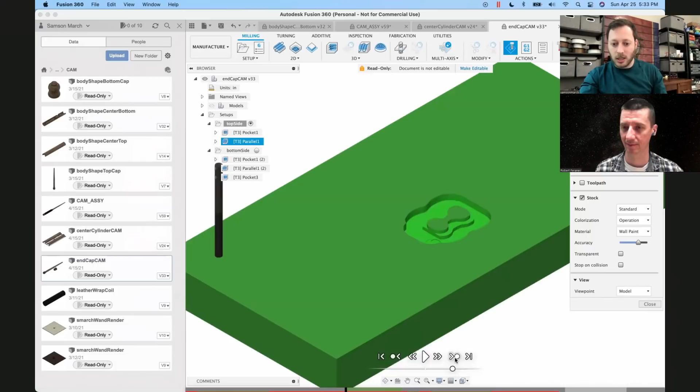So that's the CAM, that's how that works. So I have to do that, and I then do that not just for these pieces, but also for the top and the bottom. I won't walk you through all the steps, but I'll just show you quickly the simulation of it.

So here you can see the rough pass, you can see those steps. Then I'm going to go through and do that kind of finishing pass all the way. So you can kind of see now it's nice and smooth all the way through.

Then it assumes I'm flipping it over, so I'll go ahead and run it and then flip it over so you can see. But here you can see there's still a little bit of material left intentionally, like this green right here, so that it stays in place while I'm running this operation.

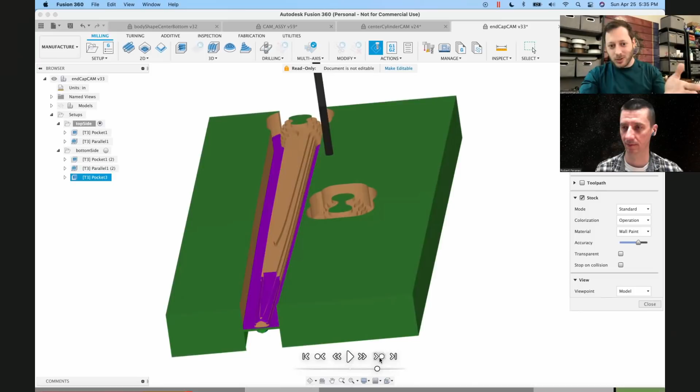So now I did another rough pass, I do another finishing pass where I smooth it all away, and then finally, once all that's done, then I cut it free.

This is interesting because when I was starting with 3D printing, the first time I saw a 3D printer, I was like, oh, I can print anything. And then I was like, not anything, there is this limitation, and you have to think, okay, I have to split it into multiple parts and maybe glue them together. Yeah, so it's very similar for this, I have to start thinking about all these different parts.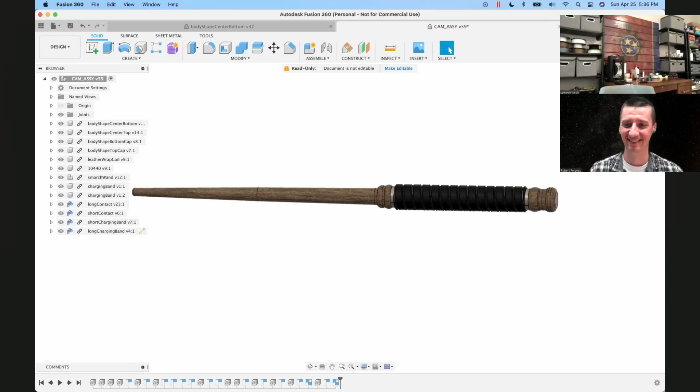Hold on one sec. I have two additional parts, and I started making another one for my fiancé, so we have two of them. But here's the little butt part, and here's the wand part, and those go, compare if we're looking at the screen below, they go like this on that cylinder piece, but you can kind of see this is what they look like when they come fresh out of the machine.

So that's it, that is the whole thing. I'm trying to think if there are any other steps that I'm forgetting to tell you about, but I think that's everything. I think that's how you make a magic wand.

Nice, we can have a quick look on the board, just very quickly. I know it's crazy late for you, and I'm sorry to keep you up so late. No, it's okay, don't worry. Do you want to look at the board? Do you want to look at the 3D files? What do you want to look at? The board, I would like to see the board. What is on the board?

Because there is higher voltage than 1.5 or 3.3 volts, it's definitely a little bit scarier.

Normally for my projects, I like to make them fully open source and let anyone that wants to make them, make them. I'm a little bit more hesitant about the plugs because they are high voltage and deal with mains, so there's a safety concern. I'm happy to talk about them in the video, but I don't know that I'm going to release the files the same way I do for other projects. If someone has the know-how to recreate these files from the video, I'm hoping they also have the know-how of what's going to happen if they plug stuff into the mains. But I want to present this as a warning: if you don't know what you're doing, don't do anything with wall electricity. It's scary and very dangerous. Now, with that being said, let's go do stuff with wall electricity.

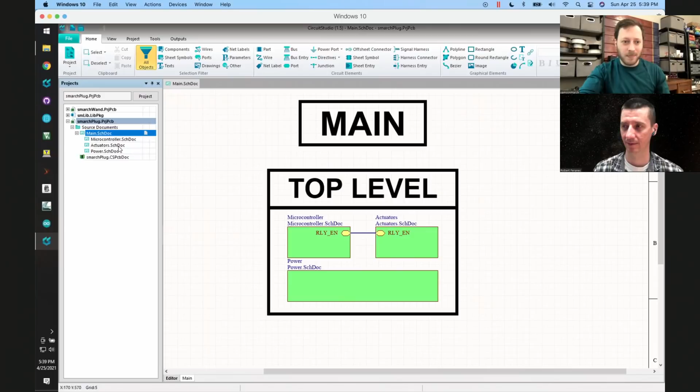I don't remember where I may have put the button, but we'll look. Where did I put the button? Oh, it's right here, okay.

So I just included the button on the microcontroller page because it wasn't enough to deserve its own page. But this is again very, very similar to what we just saw with the wand—same DA14531 part, most of this is unchanged. The only major difference is there's no longer I squared C, because there's nothing running on the I squared C bus. What was the motor, the vibration motor IO, is now just this relay enable pin. And we have this button running on a different IO into the microcontroller. Otherwise it's the same thing, right? Memory stayed the same, the JTAG stayed the same, all that stuff stayed the same.

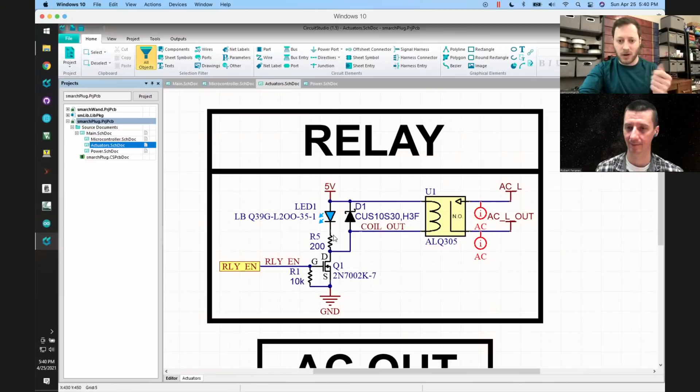On the actuator front, this is a little bit different. So now what we have is the relay enable that comes from the microcontroller that drives this FET right here. The FET is then going to pull this low, which is going to energize the coil in that relay. And at the same time it's doing that, it's also allowing some current to flow through this one blue LED, just so you know that something's on or off. And then the output of this relay, it's a normally open relay, so in theory, if something fails, it'll disconnect everything. But again, when you're designing for these scarier voltages, you want to think about how things are going to fail, and if they do fail, how can you prevent that from being catastrophic.

I assume you've probably talked about net classes and stuff in some of your videos, but I'm just making sure to label all of my high voltage, high current nets as kind of this AC voltage, so that when it comes time to do the layout, I can make special rules for them to allow for creepage and clearance constraints and things like that.

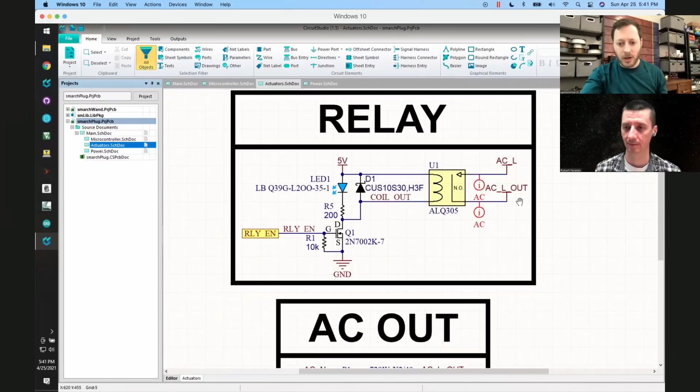So here we go, here's the relay. And then from the relay, it energizes the output AC plug. So the neutral line is staying connected, it's just the hot line that is getting toggled on and off. And then earth ground is staying earth ground. So the neutral and the earth ground are connected all the way through. It's only the live or the hot that is being energized or not in this scenario.

All right, moving on to the power. So the power stuff is pretty straightforward. You've probably seen some of these AC to DC power blocks. You've never seen these before? No. Oh man, are you in for a treat.

All right, HLK PM01, they're the best. It's literally all it is—a fully enclosed, potted AC to DC converter. I've seen something similar, but not for 220 volts. This is nice. Yeah, some people actually ask about this kind of circuit, so this can help. Yeah, these are great. I spent a lot of time thinking about whether or not I wanted to design my own AC to DC.

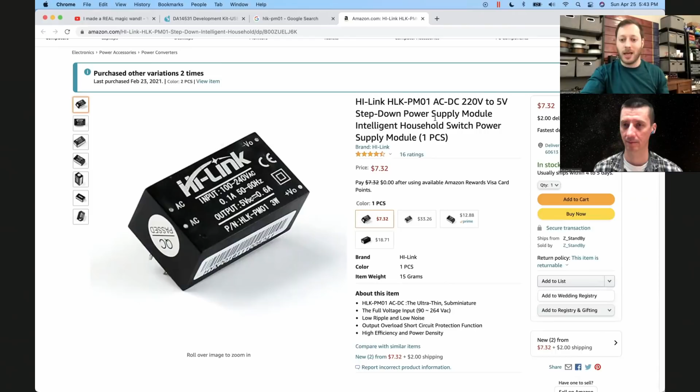And the end result was, not only was I going to spend more time doing it, but to get custom magnetics and things like that, it was more expensive than just buying something like this. These particular parts are made by this company called Hi-Link, which is this Chinese company that I don't know all that much about, to be completely honest with you. They've been around for years, and these blocks are in tons of hobby electronics.

If I was going to make this into a real product, I probably would not use this particular block, but something similar. On DigiKey you can go and buy, I think Recom, it's AC DC. So there are companies that make this same thing. You're essentially paying some additional price for the peace of mind, right?

So here, if I go with enclosed, here you go. Recom Power makes the same thing. For all intents and purposes, they're the same deal. CUI makes them, a couple others. The reason I picked this one was it was a little bit cheaper, but two, there are a ton of different Chinese knockoff versions of it. But this one in particular,

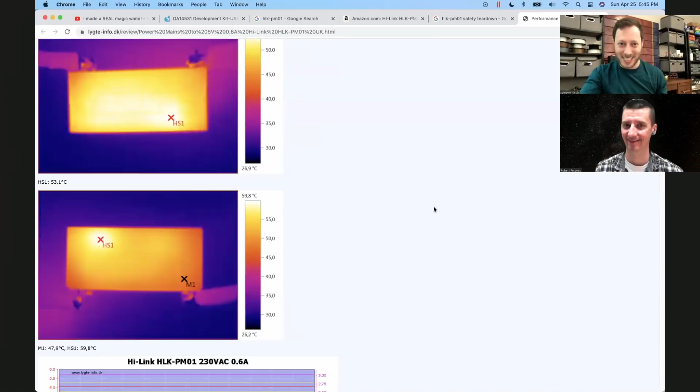there were a whole bunch of people that did some actual safety teardowns of them. After reading through all these teardowns and looking at the actual electronics inside, I felt more comfortable about actually using one of these. There's a whole bunch of extensive data testing that's been done. And granted, these were not done by certified safety agencies, so they're not 100% accurate. This is crowdsourced data from other enthusiasts.

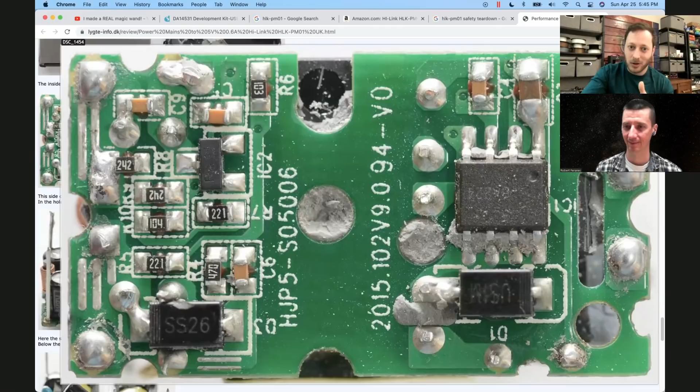But you can see it's fully potted. They follow proper creepage and clearance constraints. Looking at the right-hand side, you can see the slot that they have over there to allow for proper clearance constraints. And again, same thing here. You can see that they're using some custom magnetics. They have a varistor inside. There are a whole bunch of additional things built into these.

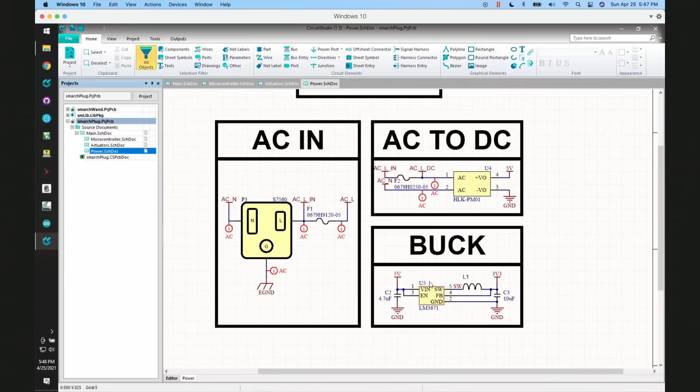Now that I've talked about that, I still don't 100% trust them, and I think you'd be a little bit crazy to 100% trust them. So in addition to one of these in line, I included some fuses in line just to make sure that if something goes wrong, we pop some fuses and detach everything from the system. And this is that same buck converter that we saw on the wand. That is the entirety of this schematic. There's not much else. We can hop over to the layout, and I can show you.

It's also pretty straightforward. You'll notice there is a large lack of copper on the left hand side, and that's to account for the fact that I don't want any nets on these high AC lines to be anywhere near each other. I want to make sure that they maintain proper clearance, so that there isn't any sort of arcing across those gaps. Everything on the left hand side is the AC. Everything on the right hand side is the DC.

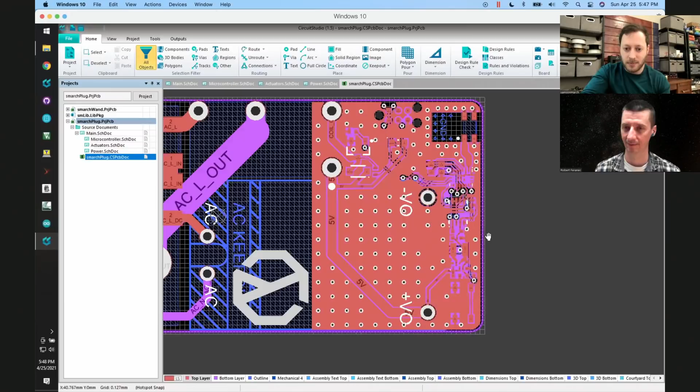And I will pop into 3D mode. So the way this is going to work now is there are two parts. There's this bottom plug part that actually plugs into the wall, and this is made by Heyco, and I'll pull it up really quick. I think maybe it's this one.

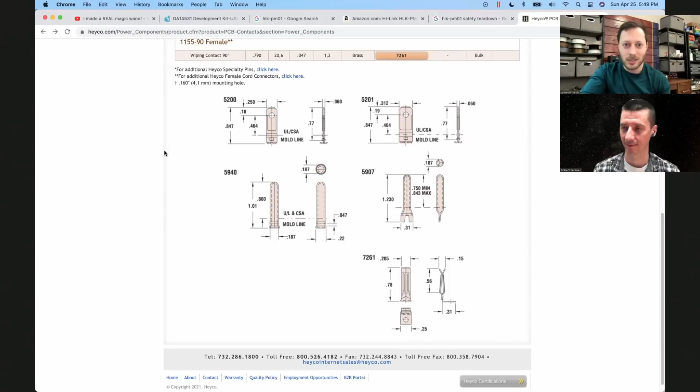It's surprisingly very hard to find a company that makes the blades that go into a wall outlet. For some reason, no one makes them that are readily available, because often they're just custom stamped metal pieces that you're making for your specific design. These guys do make them, and you can buy them in bulk.

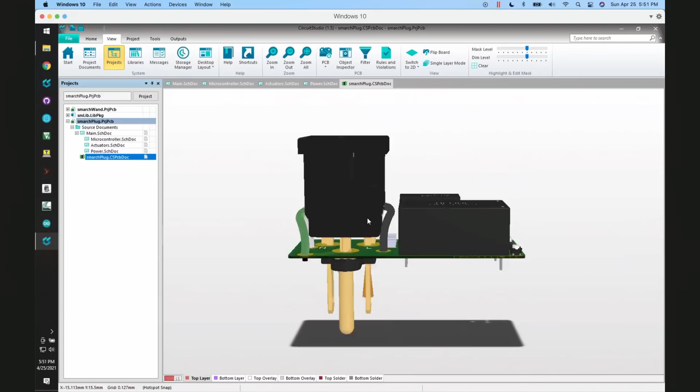So this bottom assembly, you can see with the two blades and the earth ground pin for the US version, comes in this, I think this is PVC plastic, right here. And then the top part, I can't remember who makes this piece, but it's like an IDC connector. So you run wire out from it, and then I have the wire soldered directly into the board. This all then sits inside the housing. Let's see if I can get a better angle so you can see some of the lighting better.

Okay, yeah. So you can see, this top lip sits outside of the housing, and then this piece presses up on the inside so it doesn't move, right? And then the bottom, this board, is then epoxied to the bottom of the housing.

So did you 3D print the housing, or? No. And that was something else to learn this time around. I learned all about flammability ratings. So when you're designing electronics for wall outlets and things like that, you have to be careful, right? Like if for some reason something goes wrong inside and you start a fire on your circuit board, whatever is covering it, the casework, you need to make sure that if there's a fire inside, it's not going to ignite and make everything way worse, right?

So there's a UL rating, UL 94, that talks specifically about the flammability of different materials. And I want to make sure I get this correct, but I think it's V0 or V2. There's some rating of some material that is essentially, if something catches fire, it will put itself out within 10 seconds and it won't drip molten plastic, right? And there are a whole bunch of different materials that kind of fit the bill.

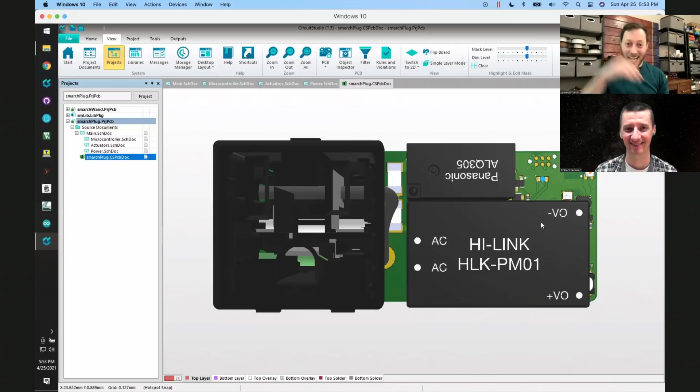For this particular application, PVC plastic, the same stuff that you get for your tubing for plumbing and stuff, has a very good flammability rating. So I bought some blocks of PVC plastic and I machined away the housing. So same thing like with the wand, I used the CNC to cut the housing blocks. And I'll show that in the video when I talk about the smart plugs.

But yeah, so then for the plugs, there are now two parts. It's like a clamshell that fits together with the board inside in between. And here for this one, I actually did do a test cut to make sure that everything would fit. So this is MDF, like wood composite type stuff. But these are the two parts of the housing.

You can see this is where the plug comes out of. This is where the big plug goes, right? This is the spot for the LED, and then this is for the button, right? Mm-hmm. So these two then just fit together, and that's the whole thing. Yeah, that's how that worked. That was the smart plug. That's what you'll see in the next video. That's right.

Yeah, I'm trying to think of a good way to present the smart plug information. You know, a magic wand is very fun, right? It's very easy to say, oh, I made a magic wand. Look, it does things. I feel like a smart plug is not a very exciting topic. So I'm thinking through a couple different ways to present that information and try and make it a little bit more interesting.